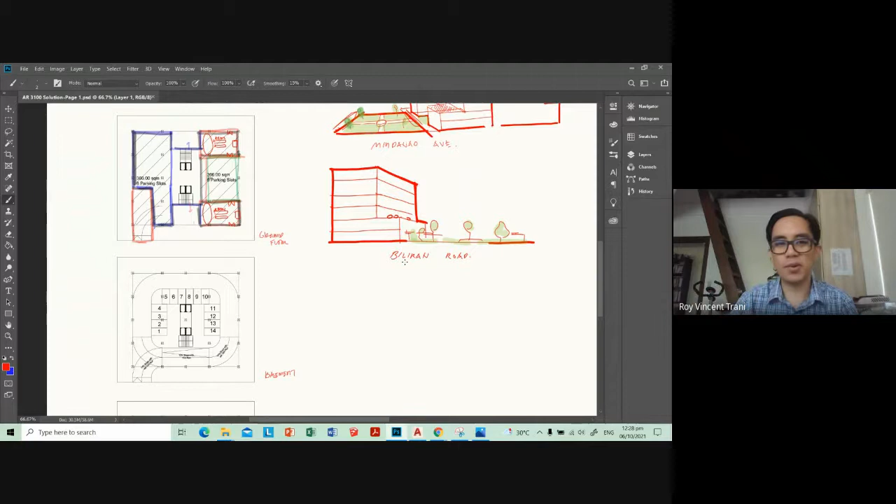Okay. So for my class, if your design is approaching a similar solution to this, this is what I would think a perfect solution would be. And although in real life there really is no right or wrong in design, for me, this kind of setup, even just with the massing, the basement, and the spatial planning of the floors, would be, I think, closer to like 95. So if you have a setup like this, your grade will be 90 to 95.

However, if your setup is a little bit different, like for example, you didn't take into account the park, we'll just call this the Ayala Park. Let's call this park. Open park. And park over here. So if your design did not really take into consideration the open park, which I didn't say explicitly, because I need to give you guys some room to explore the design yourselves, study the design yourselves, etc. So I can't give you all the answers.

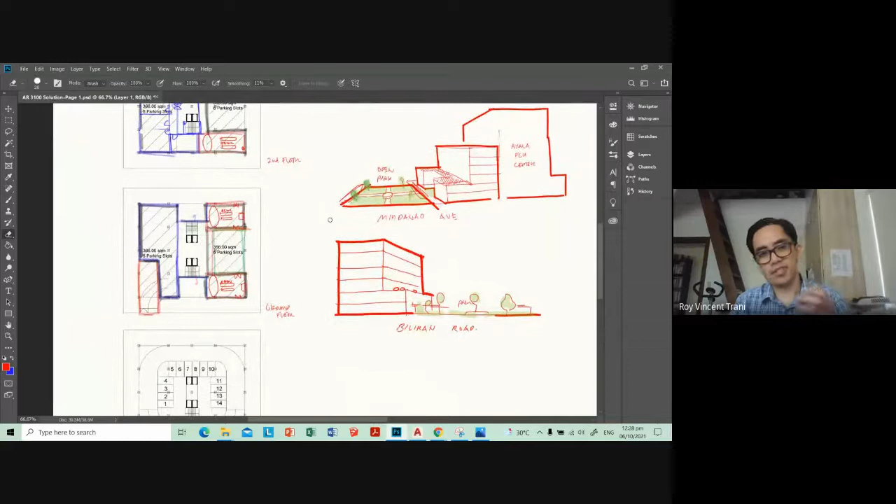But if you found this in your own way, then that means you research well, you have a good idea of site planning, and now I'm telling you, so you know, in the future you will need to consider all the spaces on your site. So most of you already knew about the enclosure, making sure the building mirrors or is aligned with the Ayala FGU Center, because I told you so. So you see my problem here, I can't keep telling you what to do. All I can do is guide you, so I can't give you the full answers.

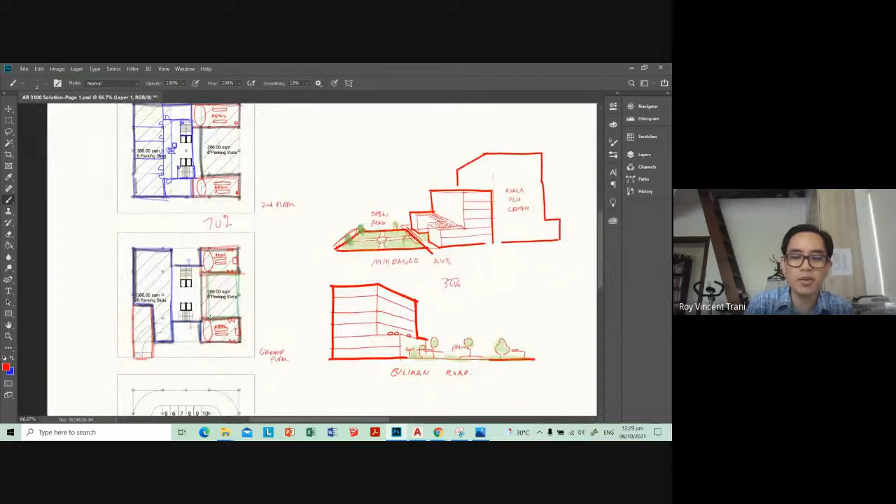Anyway, good spatial planning will be 70% of your grade. So most of you who did good spatial planning already get 70%. And good site analysis will be the additional 30%. So if you have this kind of setup, good spatial planning would mean that your parking area is on the west side. This is west side, FGU over here. And why is the parking ramp along the FGU side? Again, it's to make room for the park on the eastern side. If you have your parking area here, already you're limiting access to the park. So again, consideration of the park.

Most of the time we were talking about the FGU, because for me, that was the bigger issue. If your building only considered itself without looking at FGU, that will make a totally bad design. If it only considered the park, it will make it better, but I think FGU and enclosure is, for me, a bigger issue. That's why I really went out of my way and just told you that. Okay. Spatial planning, we'll review it. I wish we had more time to talk about it.

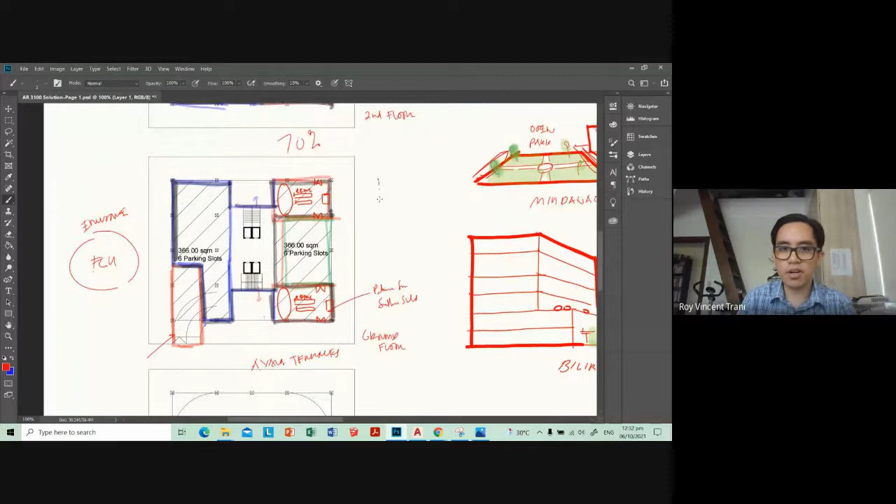Okay, so already people are going to Ayala to buy stuff. And then if you put your retail in front of where people are going to Ayala or leaving Ayala, they might be more inclined to visit a retail space than a bank space or something like that. That's my reasoning anyway.

If you put the retail on the northern side, it still works, but it seems kind of out of place, especially when FGU over here, it's all bank. And then over here, there's a park, and it seems kind of weaker. So for me anyway, in my class, I have a preference for having the retail space on the southern side.

And the reason why my bank is on the western side is mostly because of the open park over here. This is more free-flowing, more public, and the western side is more private. For me, that translates to a more safe space. And a bank is quieter and less public. That's why I put it on the western side. And of course, that follows through in my upper floors.

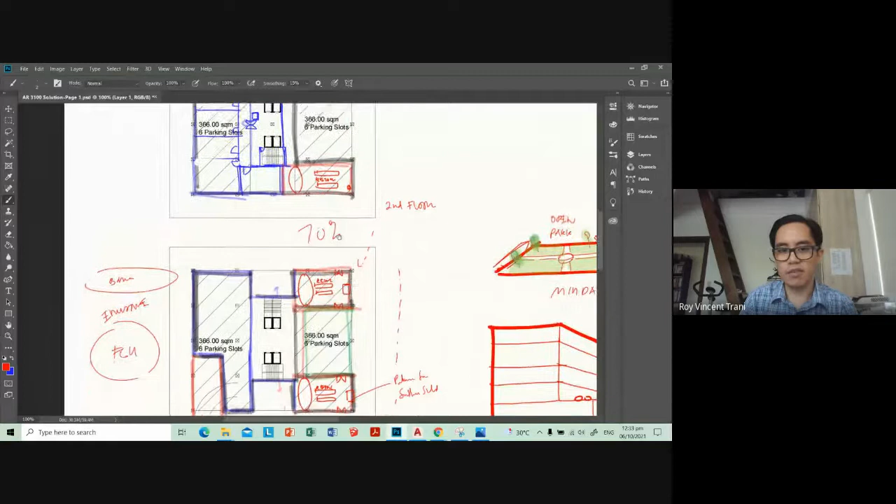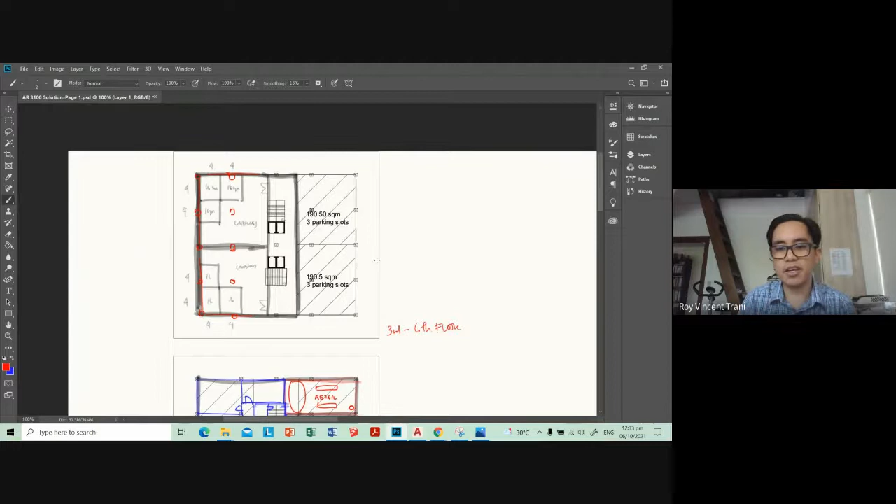And I opted for a centralized elevator and fire exit setup. So it's a lot easier, so you don't have to create multiple staircases. And then over here on the upper floors, I changed my initial design. This is why we have schematic and preliminary, because design always changes the more we work on it.

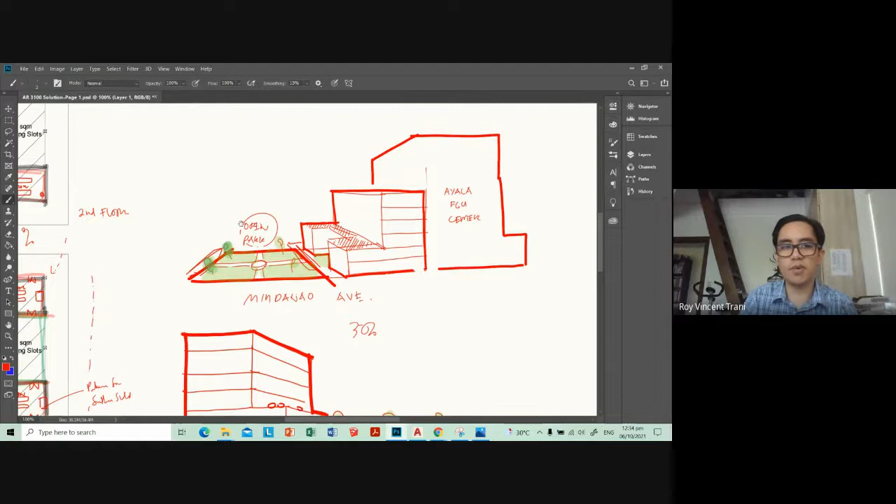And then I would probably have changed my office spaces, instead of having it on the western side, to the eastern side. Again, that's mostly because of the open park here. So there's more views to see, versus if I put it here, they're just viewing the Ayala FGU Center. So not much views and not much natural ventilation and lighting. Actually there's more natural ventilation and lighting if we move it here, but I think views are higher priority, at least for how I would design the project.

And then we'll still have about 2 meters here, and then FGU is also set back 2 meters, so that's a decent amount of setback for ventilation and lighting. Plus, with this setup, you can have a view to the park over here. You can have this all glass. And then I'll probably need some public toilets somewhere around here.

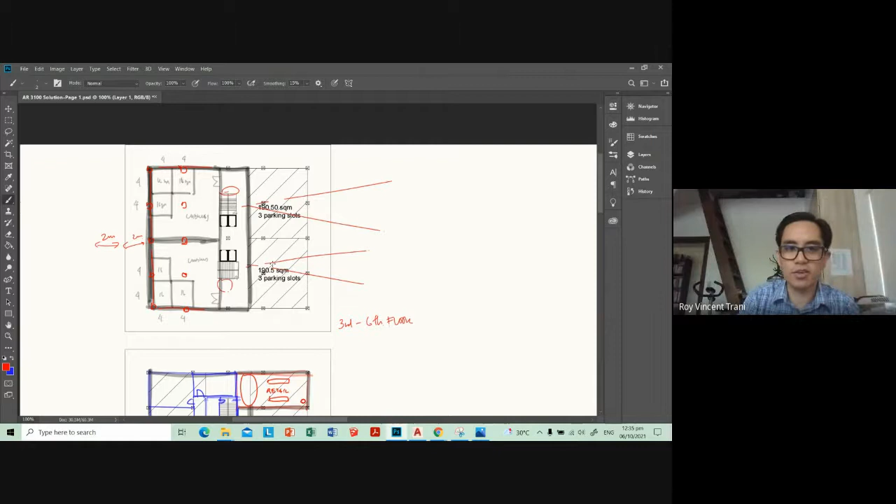So when the workers are going for their bathroom breaks, they see the park and maybe have a brief sort of respite or break from all of the cubicle life, the concreteness of it all. So I think this setup is, for me, the best setup for spatial planning and massing of your building.

And then finally, with regards to the facade, as long as it doesn't directly imitate 70s architecture, as I discussed earlier, with the very repetitive and monotonous... let's see, where's the design? Okay. USC documents, desktop, USC documents, 3100. I think it's outside. Okay.

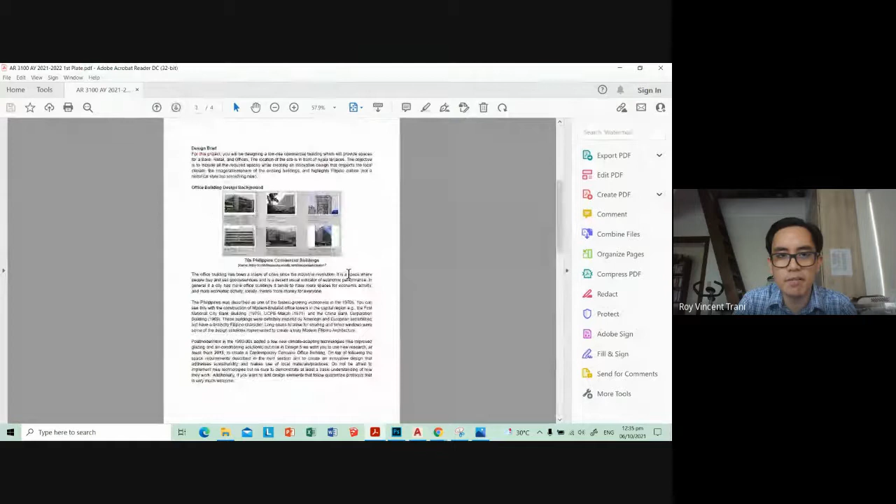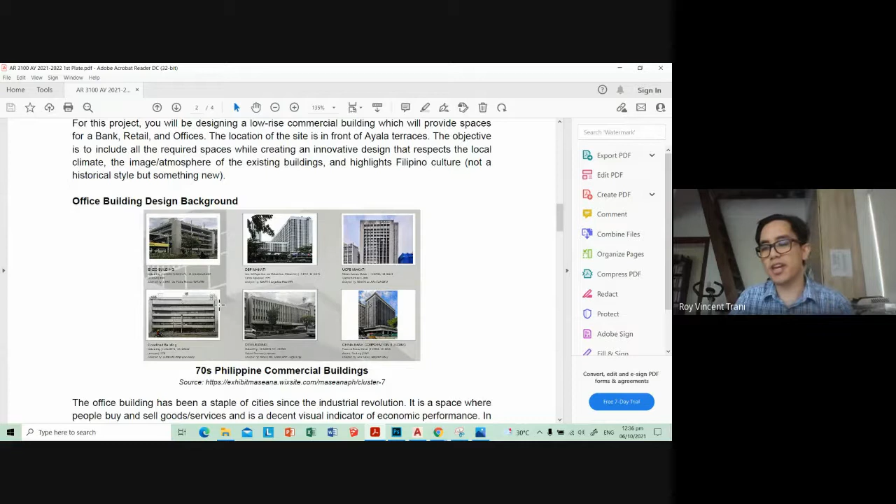As long as it doesn't directly mimic the modernism movement, or as long as it's different from what has been done before, as long as your facade is not a monotonous repetition of louvers and very monolithic modernism design, you will also get a good grade for that. So basically, if your design is just one pattern like that for the whole facade of the building, you won't get such a good grade for aesthetics.

But if you try to play around with it, which a lot of you in my class have done, like a different pattern over here, a different pattern over here, generous eaves, and I think one design had very interesting angled pillars on the ground floor, then you would have a good grade for your aesthetics and form. So I think that's basically it.

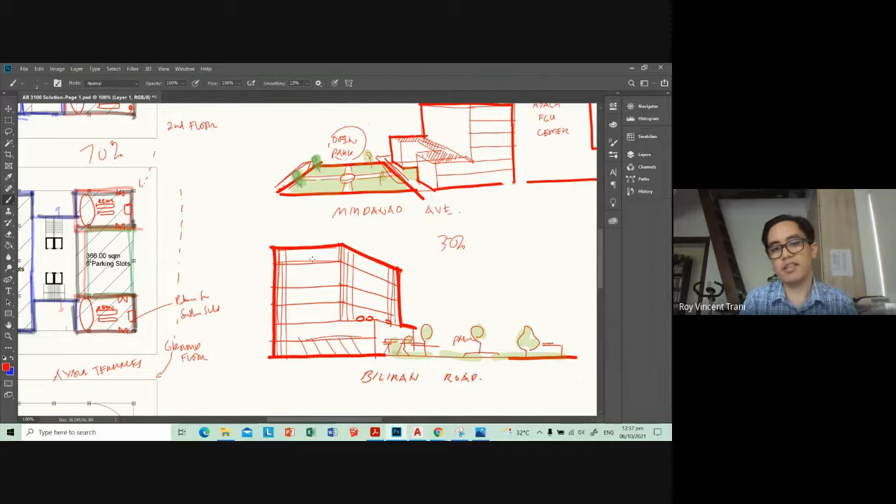So this is the function. It's good spatial planning, and the form makes sense. It's new. It's not copying, or it can reference, but not wholesale copying what was done in the 70s. So not something like this, but more something like that, like dynamic, changing, unrepetitive patterns for the exterior, which I think a lot of you have done.